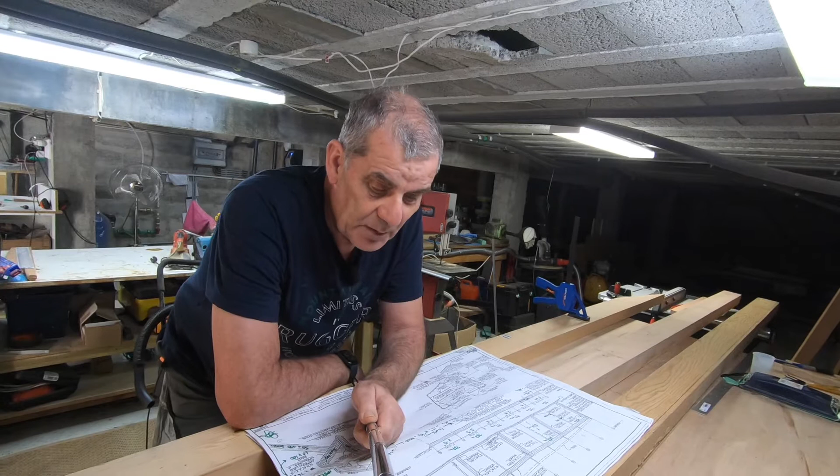So I think it's about 5.6 metres, which, when you lay it out on the floor, is actually quite a sizable boat. I was quite surprised. In fact, I almost went back to the 19-foot boat, the smaller one in the American plans. But I looked at the way that these stringers were set out, and it increases the cockpit space by 6 inches, which is nearly 200 mil, 20 centimetres of cockpit space. And I'm quite a big guy, 6'1", and I think the more room is probably going to be very valuable there.

As one of the changes that we were discussing with my wife, she wants to go skiing off the back of this, and she said rather than having a fixed seat at the front, if you're pulling a skier, then you really want to see what the skier is doing. You could have a mirror obviously, but she said, why don't you have a swivel chair, something like you see in the men's barbers. And I thought, that's a really good idea.

So I had a quick look on eBay, and of course you can find them all on eBay. You can get a pedestal chair, comfortable, padded and all the rest. And I thought, when I come to do the seats, I could just get it recovered in the same material that we're going to do the rear seats, because I'm going to have an open cockpit. The two could be divided. There's one behind the other, so you have 2 seats at the front, 2 seats at the back.

There is a divider in the middle, but if I'm going to have a swivel seat, as long as we get a decent one, it won't detract really from the general patina of this type of boat, which is a fairly traditional design, but it will make it slightly more modern in some aspects. Obviously, if I fit electric motors, that's going to make it very modern, but everything will be underneath the hatches. So from the outside, it will seem as it should be.

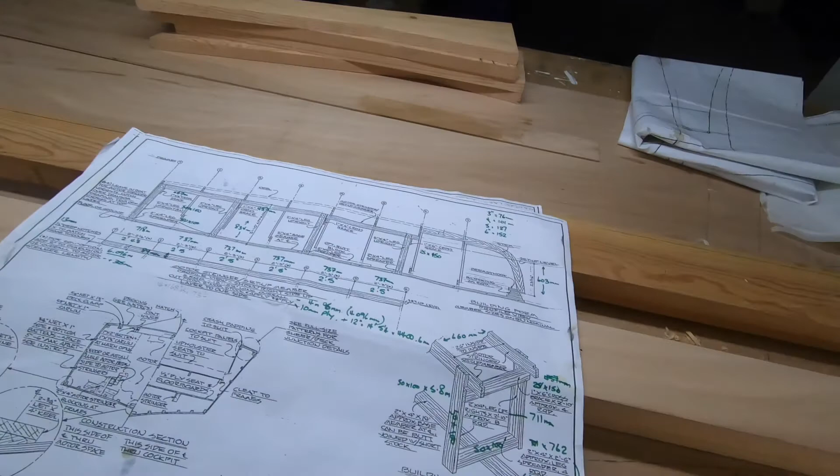Swivel chair, I think it'd be a good idea to do the 2 front, and so a little bit more room for that swivel would be a good idea, because if you swing round, you're going to be facing people potentially sitting in the back, so a bit of knee room would be a good idea. So for that reason, I've gone for the extra length of the boat, and this is the plan. This is what I'm looking at, and this is the critical drawing, I think, and this is the motor stringer here.

So unfortunately it's all in feet and inches. 13 foot 5 1/4 long overall. It says, for the 20 foot 1-inch option, add 2 inches to each dimension, 12 inches overall. So that's 2 inches to each of these, 6 of them. So it's 2 foot 2 1/4, so that's 2 foot 4 1/4, which is 718 mil. 2 foot 5 is 737, and so on, as the spacing for the frames, which is from the front end of each member.

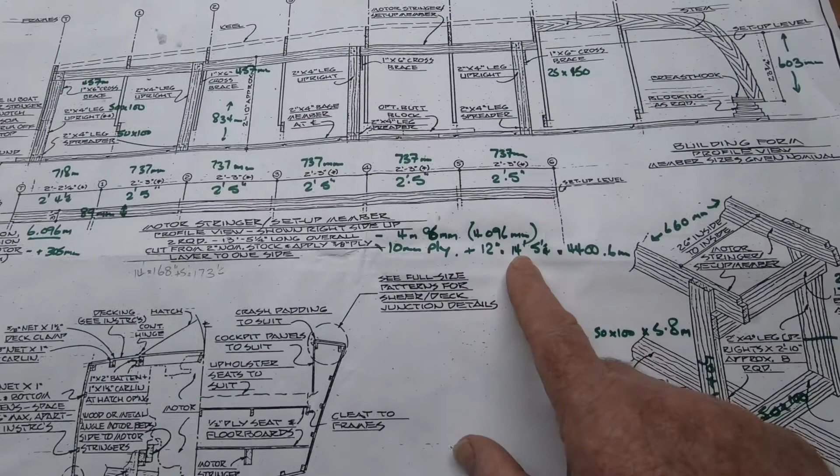And so this motor stringer was 13 foot 5 1/4, but I've added the extra length, so that makes it 14 foot 5 1/4, which is 4.4 meters and 0.6 of a millimeter. I can't cut to 0.6 of a millimeter, so to me that's 4.4 meters.

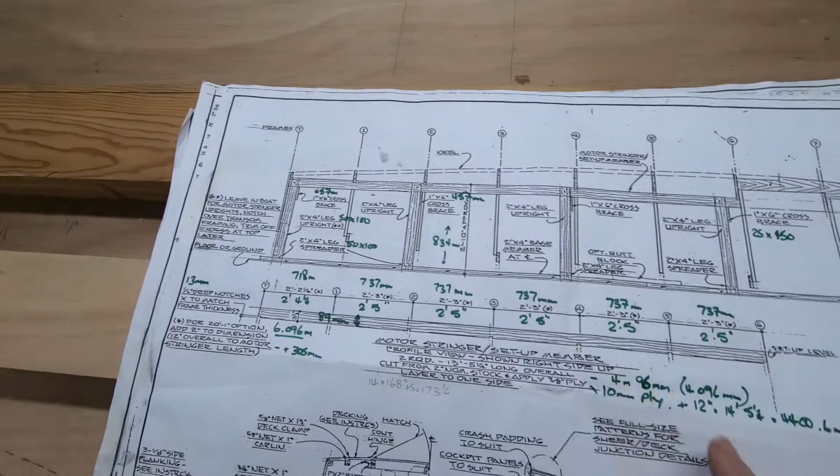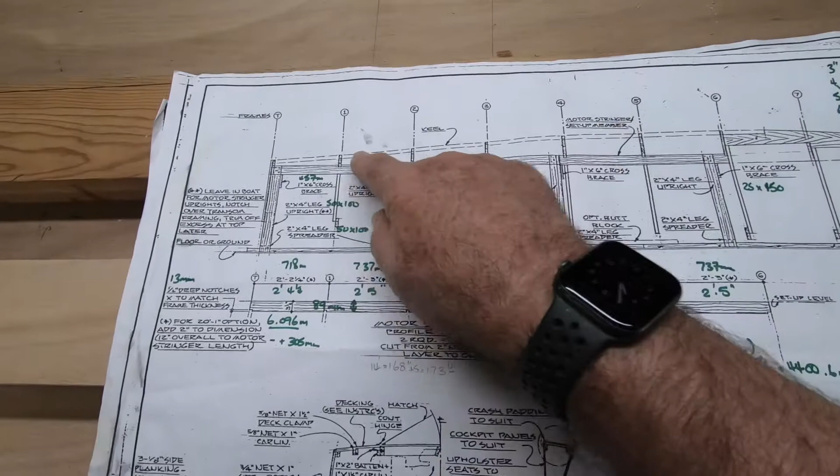So I had to sit and look and think about this. This is the internal frame structure, which is here. So this will raise the whole thing off the ground, and this is quite close to the ground here. These are the bottom of the frames, and I've got to get in there and cut these longitudinals to join that front to back, and to save my poor old back, that needs to be a little bit higher off the ground. So I'm thinking of putting a frame and standing it up at the sort of a height that I can work at quite comfortably on the top to put the keel plate in, but then also give a bit of room underneath there. So I'm going to make these a little bit higher, I think.

That's the centre spine, and there it is, 5.8 meters long, and I've already cut that, which is on the floor here, and it's about 600 longer than it needs to be, and here it goes all the way back there into the back of my workshop. And that kind of surprised me, really. It's just quite how long that is.

And I'd really quite like to set this up down in the basement here, and I can hang these frames on it. And I think if I clear it all out here, I need to put all of my machines over there, and then I could set this up here in the middle of my workshop, and then get the frames hung, get all these notches cut, and then I can dismantle it, because I've got to take it out through this door, and it's got to go up these stairs.

So it's a right old bright day here in Portugal. It's beautiful. Anyway, it's got to go out there because there's no other exit from this basement. So those two pieces of wood I've screwed together, and I'll be doing that the next few days.

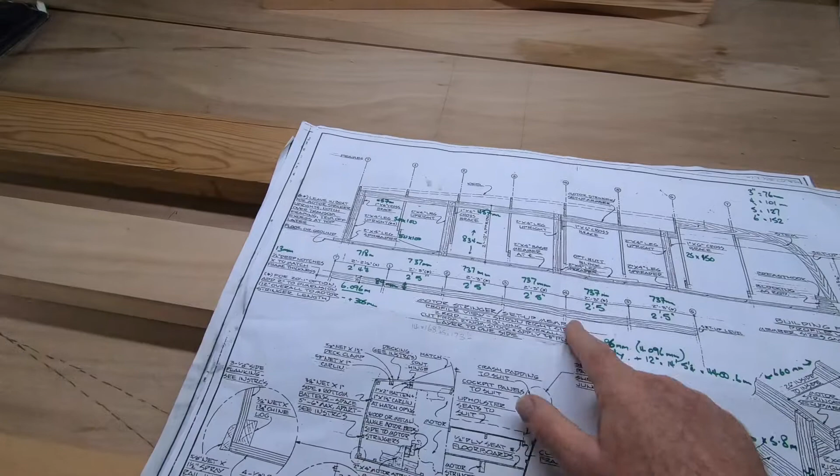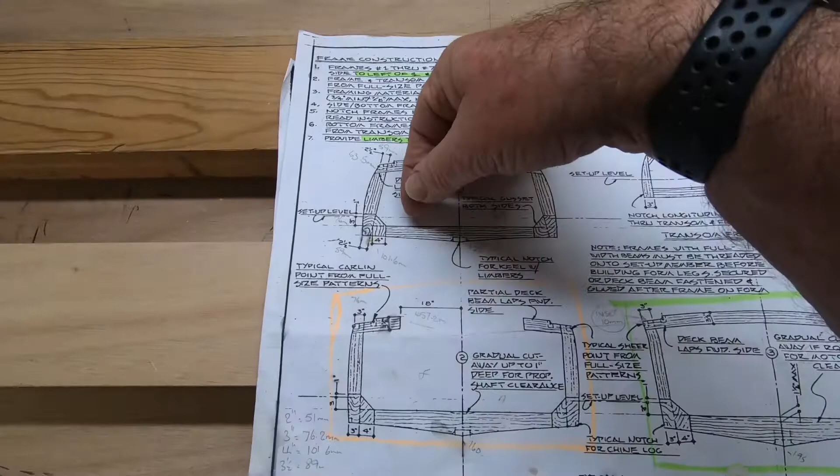So what I've started to do is to have a look at these motor stringers, 3.5 inches wide, and I thought, what on earth is that all about? Why? Because the setup levels here were all 3 inches. I thought, why is that? And once you get this motor stringer, it sits on the top here, the setup level, blow me down, look at that, it's the top of the motor stringer. So why is that 3 inches there, and this is 3.5 inches there, 89 millimeters thick?

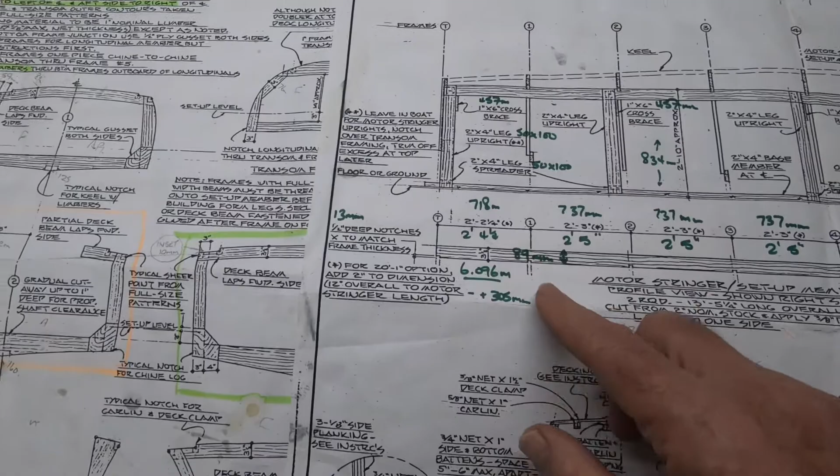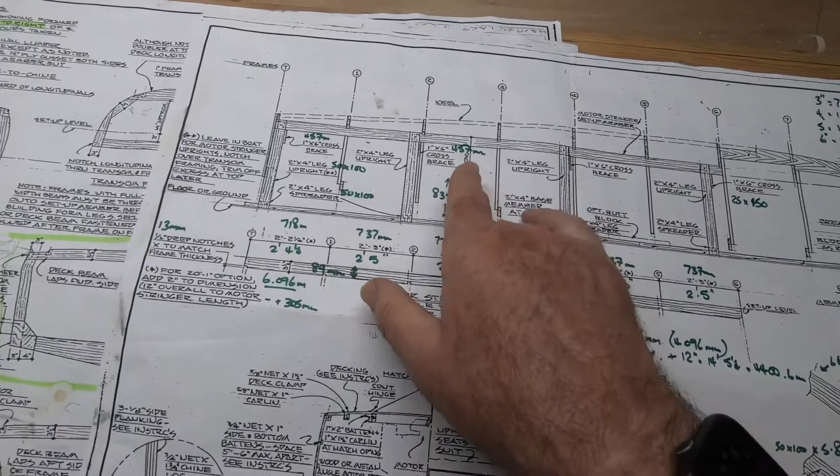And of course the clue is here. You know what, read the bloody plans, boys. 1/2 inch deep notches to match the frame thickness. So when you notch that in by 1/2 inch, that's your 3 inches, and that's your setup level at the bottom, which is of course what the floor will lie on, and the engine bolts will, in this section, bolt the engine into this compartment here, and the floor will go on here. So this setup level is obviously incredibly important. So I need to cut these into this motor stringer.

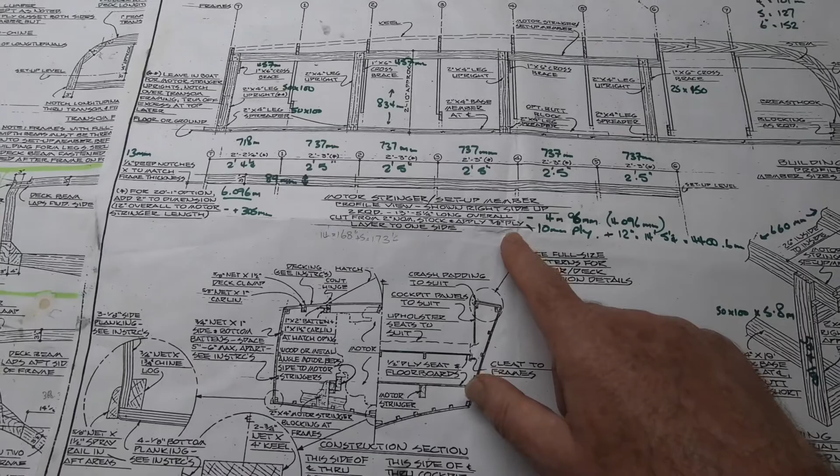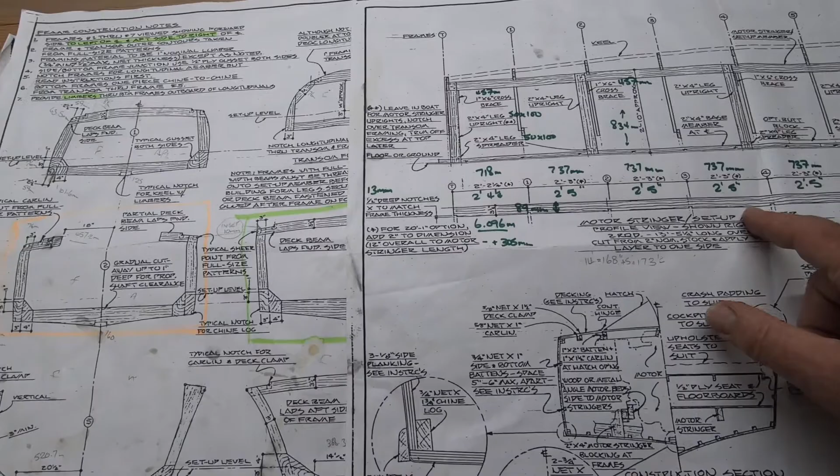It also says here that you've got to put plywood on it. And where does it say that now? I'll have to find that. But you have to put one length of 3/8 inch plywood onto the side of each motor stringer. For what? I'm not quite sure, but if it was for strength, why not just make it in thicker wood? Anyway, it doesn't explain that very well, but that's what the plans say, so that's what I've done. I'll see if I can find that. Where is it? Oh, how annoying.

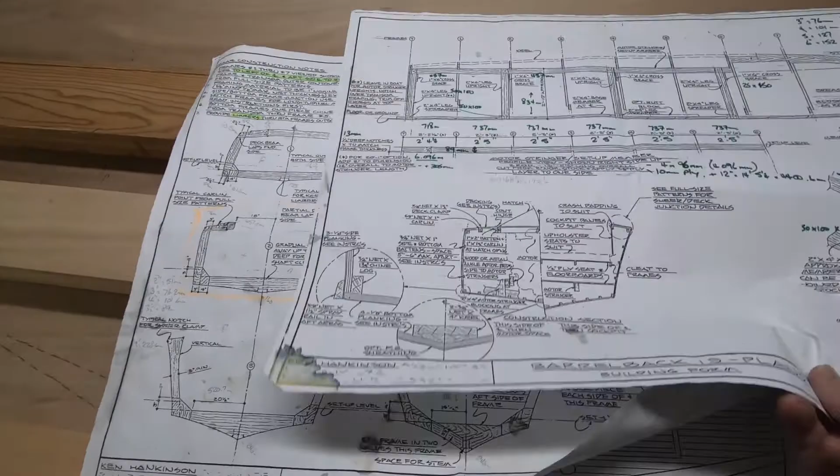So what I've started to do is cut the motor stringers, and here they are. There's 2 of them, and as you can see, they're 4.4 meters long. My length of wood is 4.2, so I've had to scarf a joint, and there it is on here. This one has just come out of being stuck together with epoxy.

This one here is one that I have finished, and my only problem is that if you look down there, it's very slightly bowed by about 10 millimeters in the middle. So I'm going to have to take that bow out when I put it on the frame, which I can bolt together with the legs to take that out, so that's nice and straight.

Here's the plywood, as you can see on the inside there, which is giving a bit of extra strength actually to the scarf, which is there. There's the top of the scarf. I'm really pleased how they came out, and that seems incredibly strong.

So this is 100mm wide, and that's got to be planed down as of yet. And so what I've done is I cut the plywood about 8 or 9mm short of that, so that I just don't end up planing all that plywood off as well. So that's the top of the wood that's got to come off, and as you can see there, that's what it looks like.

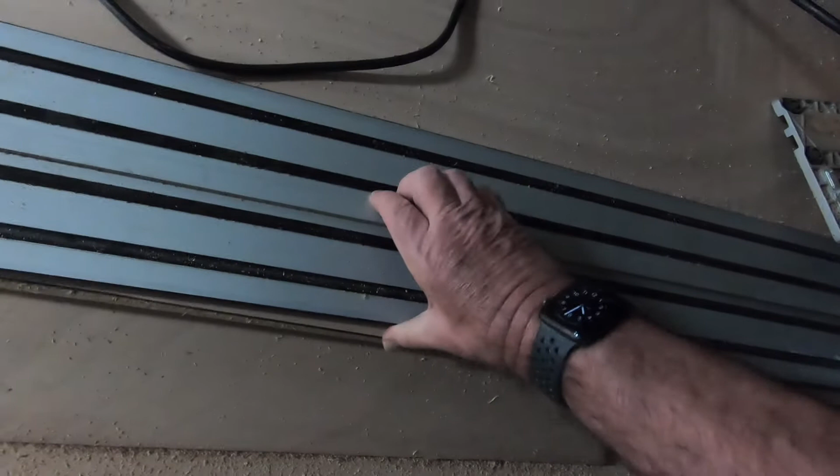So your guide rail, it's plastic underneath to stop it moving. It's so easy. You put it on your piece of wood, obviously set to your correct dimensions. This thing just slots in there, and then moving the guard, sorry, I'll point the camera, it sits in that slot. You can see that the blade there is cutting right on the edge of that guide rail.

So once you take the guard up, then you just literally follow this along the guide rail, and because it's got the plastic seats, it doesn't budge, and you just rip along and you get a perfect straight edge. And obviously I did two of those to get one strip of my 9cm plywood for the edges of my motor stringer.

So I need to just stop for a second and put this on a steady surface. So here we go. This is my circular saw, and there's the laser on the front, on a little switch, which you can see just shines. And what I've done is I can put that on that line, and I can literally split that line with the laser, and you can see as soon as you wander off and make a correction. So I'll chop that one, and let you see how it's done.

Of course, with all these things, dust management is a problem, particularly down in a basement. So I connect the hoover onto this one. There is a dust bag, but it's just a bit cumbersome. So let's see how this goes, and I'll let you see how I cut it. So, turn on the hoover.

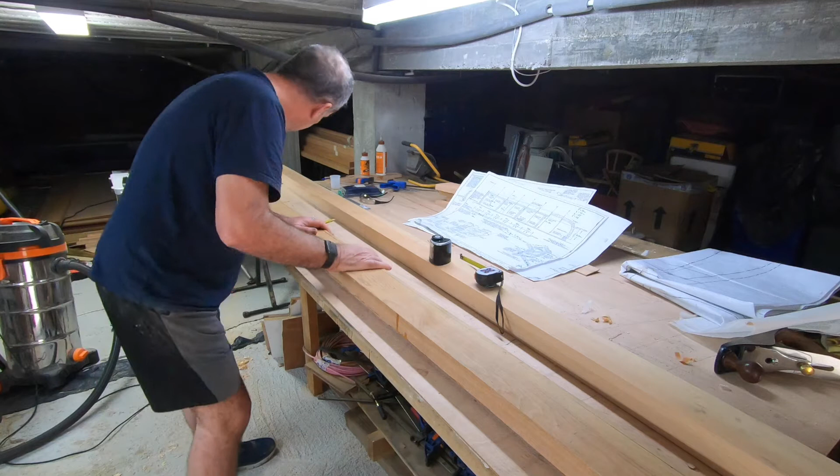So this is my motor stringer, and the plywood's on the other side. As I said, I've cut the plywood at about 9 centimeters, 92 millimeters, something like that. The wood is 100, so hence the lip, and I've got to plane this down to a little bit below the top of this here. So I've got 9 millimeters to take off, and so what I'm doing is I am measuring along here the depth of my motor stringer, which is 89 millimeters. Do you know, it's a really good tip.

Tiniest little automatic pencil sharpener, and when you're drawing these things and you want yourself a sharp pencil, there it is, and makes life easy with a sharp pencil.

So I'm going to draw a straight line using this straight edge, and then what I do is, to make sure I've got it bang on 89, I put it at about 88, just inside, because then that's the width of the pencil. And then when you alter one end here, 88, it rotates around the other end, so you've got to go back and check it to make sure you've got exactly the same, 88 to 88,

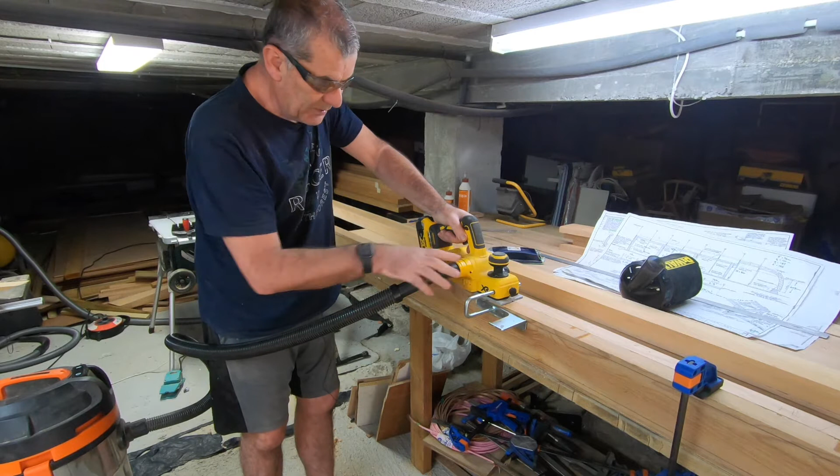And one of the really good things, actually, I do actually have a dust bag here, and it will clip on there. It fills up quite quickly when you're doing this, and I've found that the best thing is to stick the hose there, and the reason is that I can push this plate here against the side while I'm cutting, and keep it bang on at 90 degrees, and then just keep running it until I come down. I put it on the minimum setting at the moment, so let's start.

Brilliant tool, brilliant. Makes life so much easier. Yeah! Should have charged the battery, shouldn't I, before I started? You can hear it's just starting to give up. Getting very close. Very close.

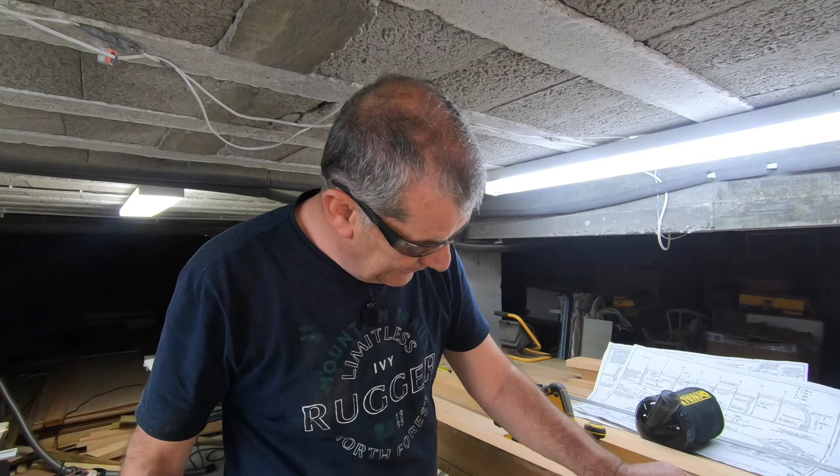You get the idea. Tools make life a lot easier, particularly when you're taking this off, but also the accuracy that they offer. I did think about running about 5 millimeters off on the table saw, but it's such a huge amount of wood to control on a table saw. You start getting inaccuracies, and you don't want inaccuracies. You really want this to be cut flat, but also at 90 degrees. So I'll just go and get my right angled thing and just check I'm getting what I want.

So this is interesting, and it's brought up by the fact that as the scarf joint there is at 90 degrees, if this was perfectly perpendicular at right angles to that face there, this here would be at right angles, and it's not, which just shows that this end is coming up slightly, and it looks a lot worse than it actually is, because if you look at that gap, I don't know if you can see that gap there, but that's about 1 millimeter lower here than it is here.

And so I'm kind of relying that this guide on the electric plane is at 90 degrees, and it probably is, but the thing is even when you push that, you can see you've still got some wiggle room there to wiggle that backwards and forwards. Even though I'm pushing there, you still see it's not a perfect fit, is it? That plate needs to be deeper down there to stop that wiggling, and I've sort of moved this around and swapped sides to see if I can see what's going on.

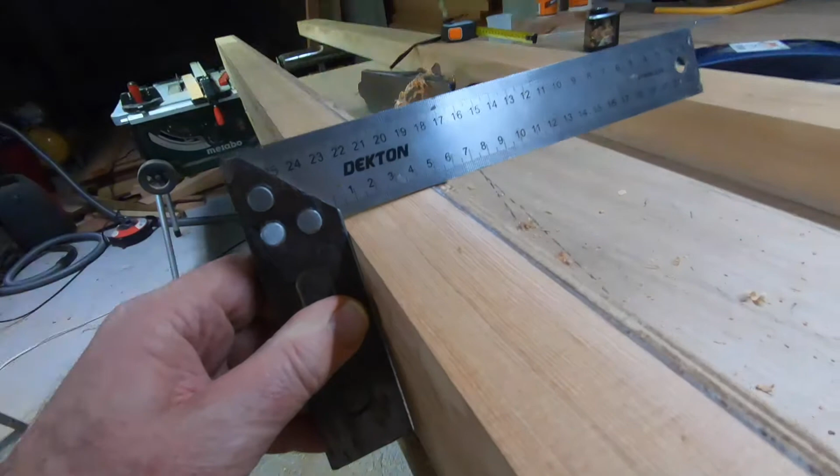So all I have to do is to carry that on along here, because if I use that there, you see there's about 1 millimeter gap, so this is not planing at right angles. I'll have to think about that, but this is just a roughing tool anyway. This is not the precision finish.

As ever, the hand tools is the way to finish it, and then you get this perfect line, and you see now that I've done that, that's far better, isn't it? It's perpendicular to this cut, which shows that we must be at right angles. Good, we're getting there, we're still learning.

Well, I've just done the second pass. I'm a good half, 2/3 of the way through, and by just making sure I push that right angle edge against the wood, actually using the hose extractor as a guide there. Look at that, so it's me, it's not the tool, and that's put that bang on the line. That's my 89mm, and that's bang on square. Much happier with that. So let's carry on.

Right, I said this would be a warts and all, mistakes and everything. I did have the first jig made up at the back there, which I tried to make out of my old desktops because I've got loads of that left over. But I hung the transom on there. And first of all, taking off all the back, that was all screwed on because I knew I had to take that off, because eventually the deck stringers are going to come, and it says to notch them into here but not into those pieces of wood.

And of course, as soon as I put the weight on it, that's what happened, it split. So I thought, Boycie, you idiot, you really should have done that in the first place. So I'm going to use a piece of the Douglas fir. I'll use a thick piece to cut round there. And I thought, rather than get stuck into that, why don't I get finished with doing the last of my frames. So I'm on 4 and 5, I've cut the uprights.

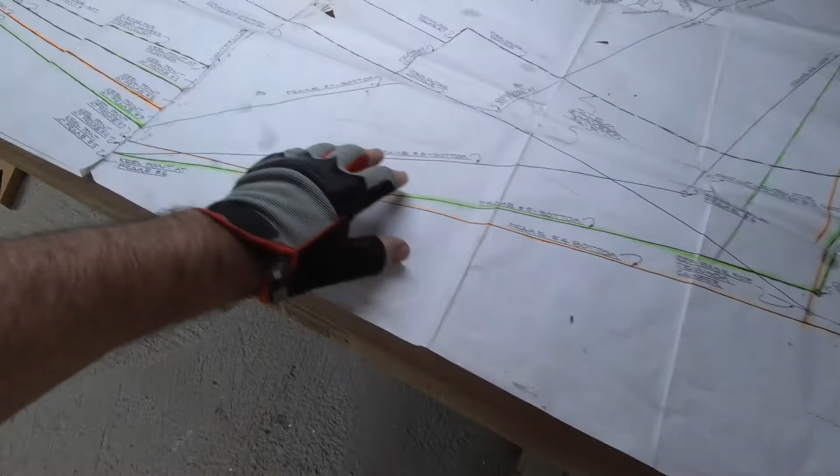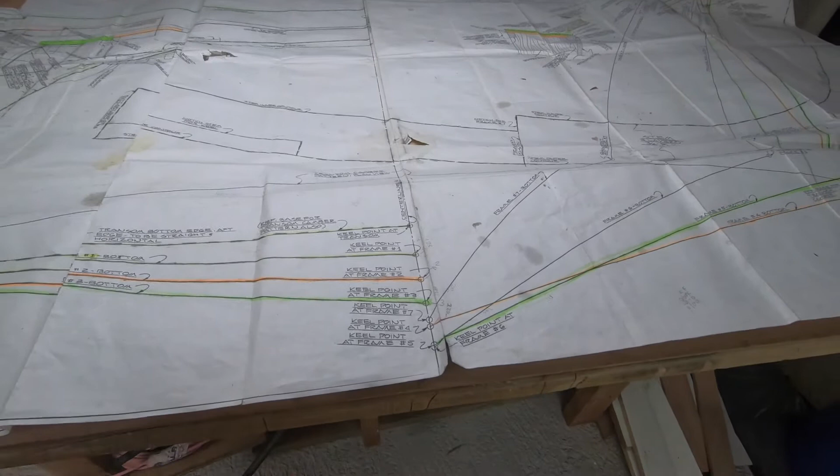Here's my piece of mahogany. I wish I'd have got mahogany in the first place. Much harder wood, beautiful when that's varnished. That will look fab. But this is right at the front of the boat where the chine is increasing. There's this one, the next one is the full width of the wood, hence why I had to buy that. It will be stronger, and at the front of the boat, that's where it needs it. So that's okay, I can live with that. None of these will be seen, these are all under the floor anyway. But it's just nice to know that there's a really strong piece of wood under the floor.

So here I am, I've cut my piece of mahogany, beautiful wood, look at that. And using my spokeshave, I've cut back to the line, and you can just see the line here on the table that I've marked out. And this one here, you can just see the line disappears there, and it's repeated there, which sort of confirms that's just a slightly high bit. And I mean, we're talking less than a millimetre here. And there's, oh God, there's yesterday's cock up. I don't know how I did that, but I got that line wrong by 3 or 4 millimetres there.

Which wasn't desperate news, because all I did is I put the piece of wood that I cut off and glued it back on with some epoxy last night, and then I've just cleaned that up so that it's back on the line there again, which just shows how accurate you've got to be when you're drawing from the main plans, using the carbon paper to draw these little lines. You've got to be spot on, and I don't know how I did that.

But that's not the end of the world, because that's going to sit underneath the plywood, and it's not the structural bit out there. I mean, this epoxy I think at times is stronger than the wood itself. So these are the bits now I'm going to mark out to do my cuts in. So I've got a cut on the mahogany and the Douglas fir bit, and then put it on the saw, and then I can glue this stuff together.

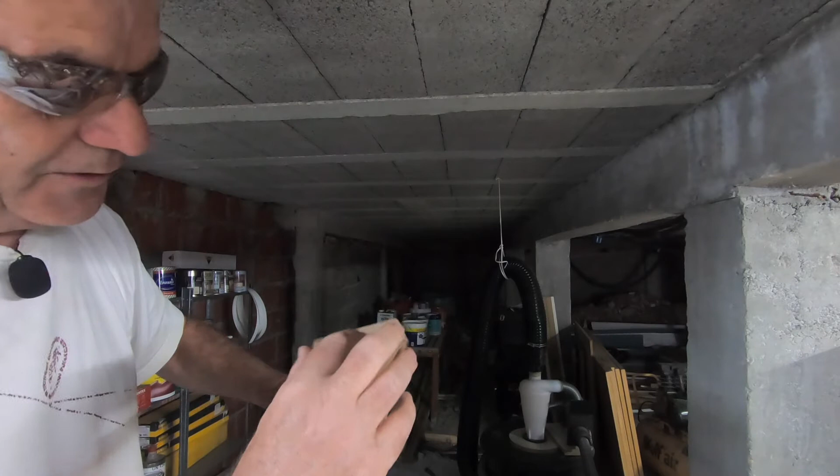There's the halfway. Turn it over. Actually, that was a good guess. That was a very good guess. Look at that. Just nip that off with a very fine line there. So that's set up exactly halfway.

So the bit I didn't show you was this. How to line up my cut line, which is on the good side, because it's actually going to cut down here on the bottom with the saw, which is why I draw this line along the top, because then I can use this adjustable fence, which is very handy. So I can put my piece of wood there. You'll see that I've drawn a line on the piece of metal, which is the cut line of the saw, and then by putting that against there, I can adjust the angle that I need to exactly cut down that line, which is about there.

And then once I've got that set, I just tighten this up. The angles are down there if you need them, but I don't need them. So when I start now and cut, holding it to this fence, it will cut exactly down that line as required. So here goes.

So here's frame 4 left. That's my piece that I've cut, and that's it fitting over the base, the bottom of the boat. That's my half lap joint, and now I've got to cut into this piece of mahogany, and here's the right side. It makes quite a nice fit, and when I've cut that off, that will then be flush. And the bit on the bottom there is just overlapping, but I do that deliberately because then when it's glued, I can shave that bit off. So let's get into that.

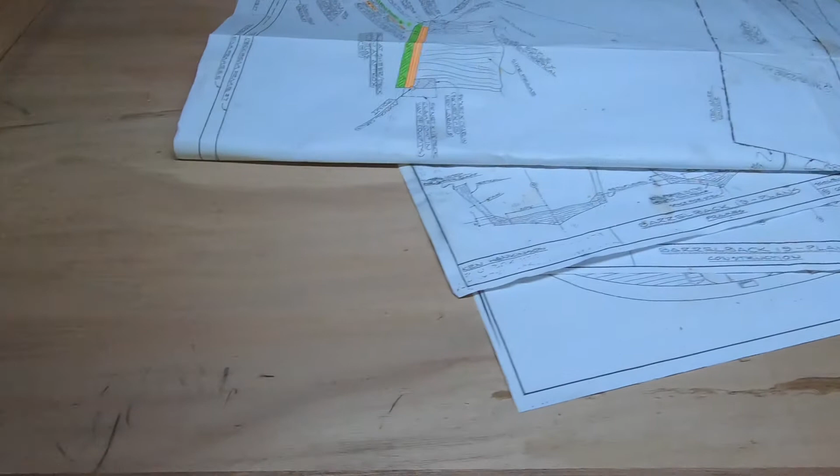There's my bottom chine cut out, and there's 4 left and right uprights in place, and I've got that just about right, because you can see there, if I lift that up, there's a piece of light there, so that's exactly half and half, so that's worked out pretty well. And this one is just a little bit high. I'm going to have to take out about 0.5 millimeter on there, which I'll probably sand out to get that true. And then I'm going to cut my pieces of plywood out on both sides. Then I'm ready to go.

I'm cutting out the square bits of plywood, which will form the bulk of the strength of those corner joints. And I'm just cutting them out of my 1/2 inch plywood here. And I just wanted to show you how easy it is. You see that laser line there? You can just line that up and split that.

And you can see that line, and you just split it all the way down. It is so deadly accurate. I just need to move the clamp to get that last bit off. So finally,

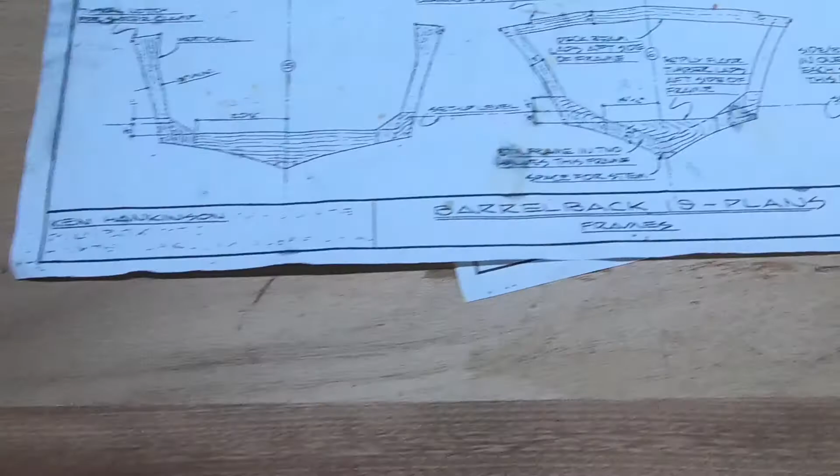here's my piece of plywood in the corner. There's the doubler, one underneath and one on top. And according to the plans here, it's 3 inches, which is 76 mil up, and 102. Sorry, I'll position the camera properly. 3 inches up and 102 in there, and then cut across.

So I've just oversized cut my piece of plywood, and I've marked in there from there to there 102, and up there 76. So that's about the position of my plywood. So all I have to do is mark that off there, and if I mark that just there in that corner, in fact I could do that just to make absolutely sure, then I can draw that line across

to cut it. And then I've got the other piece up here, making sure this is just holding parallel. I'll double both bits of plywood up, and I'll cut them on the bandsaw. Okay, here we go. There we go.

So I've marked out my plywood fillets or strengthening pieces in the corner. There's the two bits, the horizontal and the vertical, and this is the triangular bit where I'm just putting an extra piece of wood in there just to strengthen that out. There doesn't seem any point in leaving that empty, because it's just going to get water. You'd need a limber hole in there.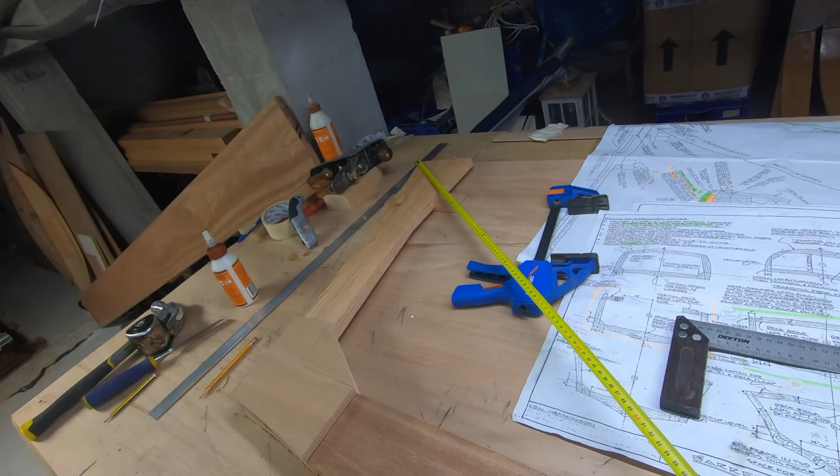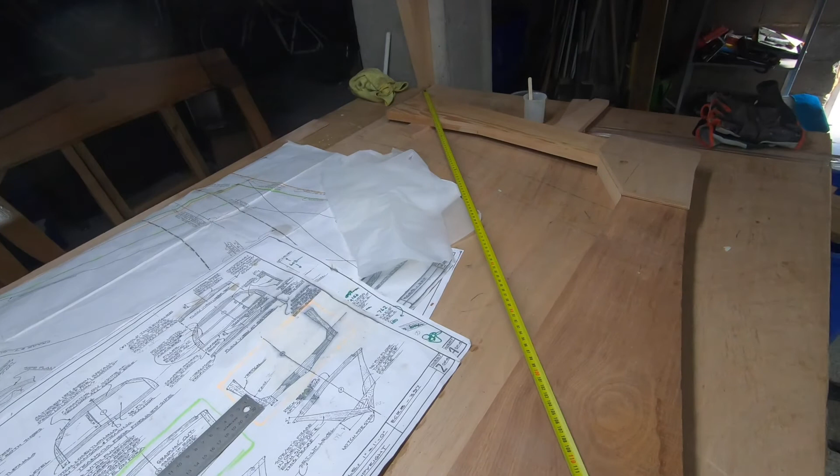And this is the bit where I can check to see how my setup has gone. Because if I put that tape measure on the corner just there, I get 128 centimeters exactly. Now if this is right, set that one there, and look at that. Oh, hang on, I mean, that's within a millimetre. In fact, no, that's pretty much spot on.

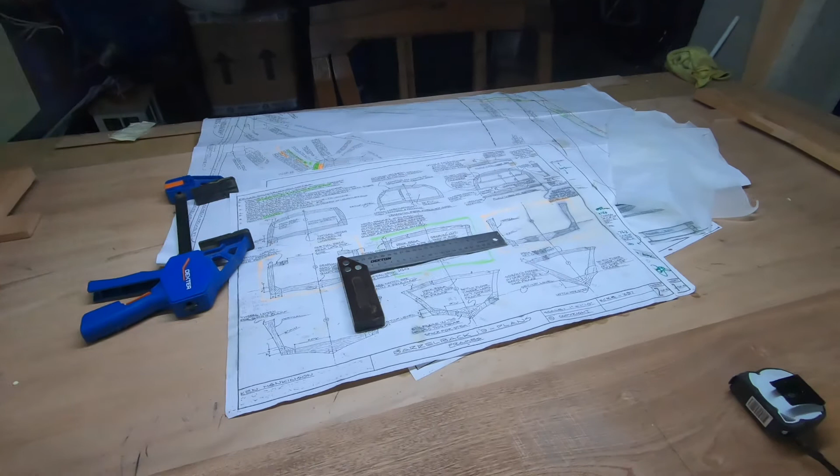That's really nice when that happens, after all this work of cutting out, marking out, and they're exactly symmetrical round the centre line, which means I'm all set now to start gluing up. And then what I should do, I think, is just drill a hole maybe through the top bit there, because that's going to be cut out for the sheer strake. I'll put my washers. Oh, I've got to cut out where my keel plank's going to go in. I must do that first.

But anyway, I'll screw this with those washers to secure it so it won't move. Do the same on there, and then take these top pieces off. And then I'll put the glue in and just put a nail in there to hold it, just to make sure nothing moves away. Then I can stick that piece on and put my nails on, and frame 4 will be well on its way.

So here's a question. Here's my bottom plank, and this is the cutout area for the keel planks. There's 2 of them to go in there, both 20mm, so that's 40mm to there, and then that'll obviously have to be planed off to fair off for the planking. So my question is, if anybody's out there who knows more than me, and there's probably a lot of people, I've got to cut that bit out, and this bit along the bottom here is no problem. I can cut down here with the saw to the line, but how do I get that so it's exactly flat and true?

There must be a better way of doing it than what I'm doing, which is really to cut this with a chisel and then use a chisel to flatten it out. Is there a better way of doing it? Perhaps somebody watching this video will let me know in the remarks.